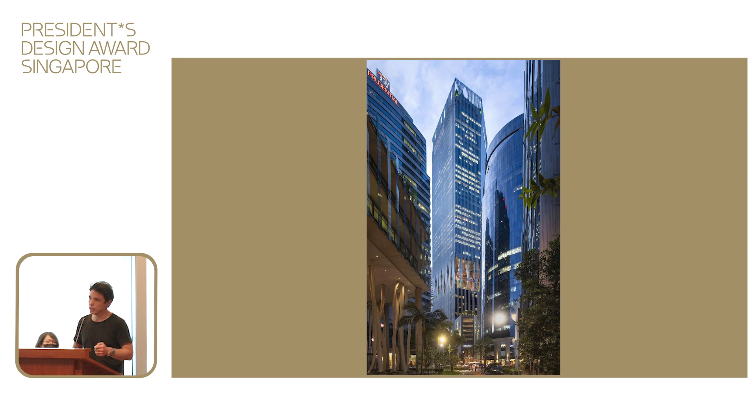I think one thing you definitely realize on a project like this, when you show up at the building site and there are 900 people daily working on it, is how it really puts you in your place. You understand it's not just your project, but everyone else putting time, effort and energy into it who has a piece of it too. This idea of architecture and its potential to connect people to something larger than themselves, to communities around themselves, has been at the heart of this project.

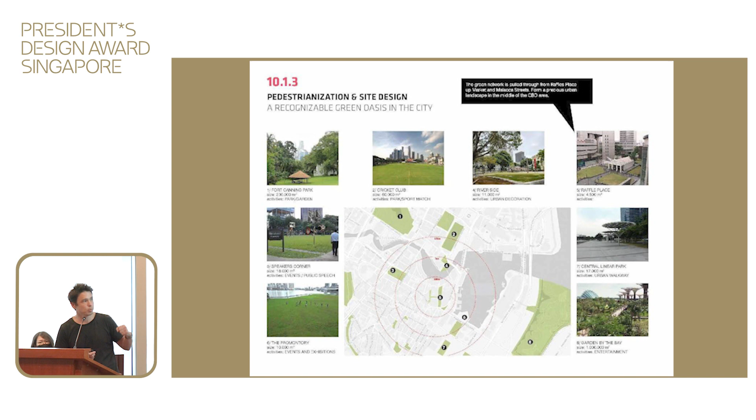From the outset, we were really trying to understand both the role it could play as a piece of tropical urbanism, a piece of the kind of infrastructure in Singapore, but also given its importance as a site in the historic center of the central business district, how it could really contribute to the different communities around. It's part of a network of different green parks and areas.

We were trying to imagine how it could be something that could begin to connect these green areas together, that could become a kind of true extension of the public realm, not only in the CBD, but again to start connecting to some of the areas further afield.

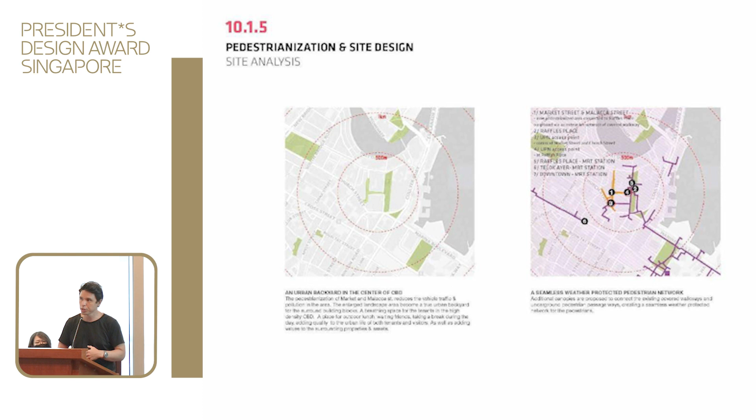So there was a starting point. There was a really rigorous analysis of its situation in plan, how it could be connected seamlessly to sheltered and shaded walkways. Weather protection in Singapore, of course, very important. How it could extend porosity in the city center, be connected to future initiatives such as the larger cycling network.

And really what we realized in the beginning, because it occupies the site of the former Golden Shoe - not Golden Mile, Golden Mile is a very important building, one of my favorite buildings in Singapore - but Golden Shoe,

it's a huge faux pas. Golden Shoe Car Park, which was built in '84, and at the time was really meant to provide parking capacity for the city center, but had also become a bit of a wall, you could say, in the city, in the CBD.

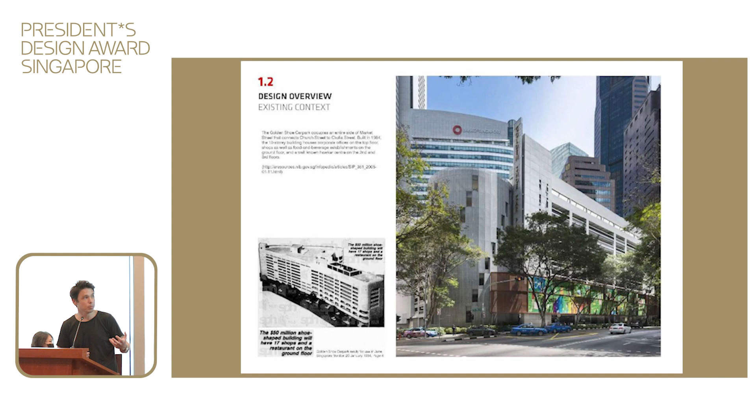Over time, as we understood, it had also become a place that was really occupied more from the hours of 9 to 5. So there was really a lot of thought about how the project could be something that increases porosity on the site, and begins to rejuvenate the site and the surrounding area.

One of the first things we realized is that the site itself, because it is amalgamated over a series of historic sites, has a bit of a strange shape in plan and required a substantial amount of cleaning up. We looked at, this is just a small subset of some of the schemes that we had looked at over time from a kind of massing perspective.

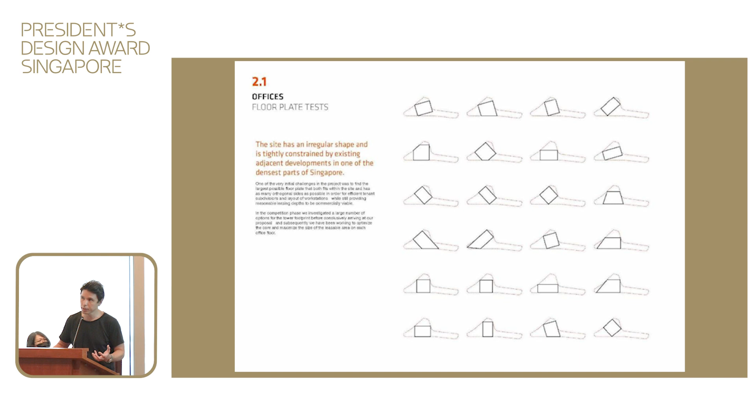But really the starting point was a kind of exercise in understanding how we could clean up the site, how we could extend porosity in the site, and what that would mean for the tower.

And it turns out that the solution for us was relatively simple, which was to imagine a tower core, to offset a floor plate to a kind of efficient and optimum depth, and then to simply rotate it to maximize how it fits in the site with a relatively simple geometry.

So it takes a kind of diamond shape, which also happens to mean that because it's rotated off axis, it provides generous views for everybody who would occupy the offices in the upper portion of the tower.

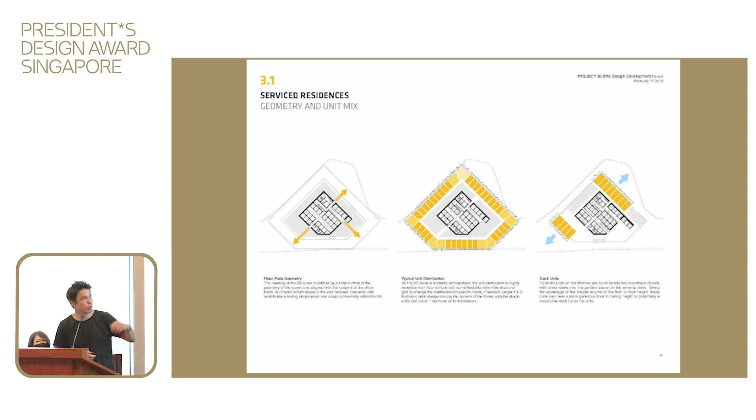So the upper portion of the tower is offices, the lower portion is occupied by serviced residences. And what this meant also is that it would allow us to then occupy the perimeter with rooms to create a kind of internal atrium space around the core, but basically also to give everybody very generous views outwards from the site.

So we had a sense of what this would mean in terms of the planning for the tower. And then we began to imagine what this could mean in section.

And we thought, what if we imagined the offices as, in a way, a kind of generic block that is elevated as high as possible to maximize the commercial value of the offices?

What if the serviced residences are also imagined as a kind of generic block that sit connected on top of the podium, so they could have access to recreational and other amenities?

And that would give us some room to begin to play with the tower in terms of the specificity of how it touches the ground, of how the service residences touch the offices, and how it touches the sky.

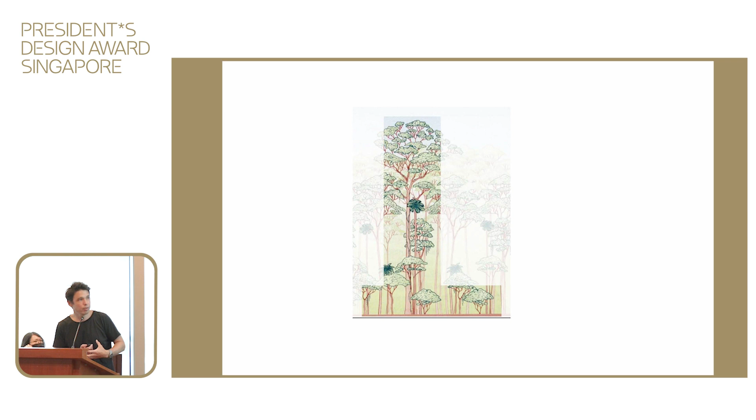What if, in a way, because it had this diamond shape in plan, we began to play with the geometric versus the organic? And then we began to fantasize and to dream a little bit about what it could mean as a kind of example of tropical urbanism, to bring the kind of lush greenery into the tower at various levels.

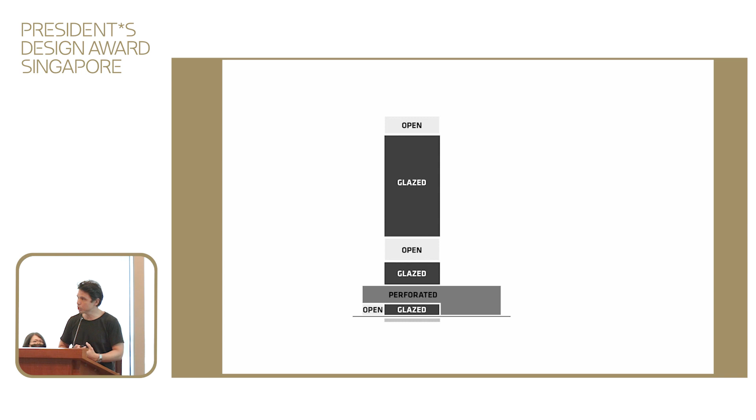Of course, this would also have to work with the facades, which would be glazed at some points, maybe much more open in other points.

And then we thought, since it sits in the historic central business district, with some great examples of modernist architecture, what if we simply took a classic modernist pinstripe facade, brought it from top to bottom to unify the tower in a very simple gesture, and then began to pull it open to reveal the green and social spaces.

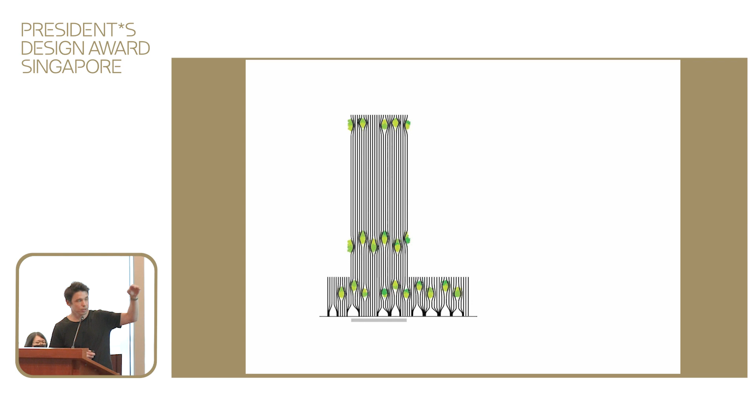That sit within the tower itself as a kind of invitation to the surrounding community to look inside the tower and to be invited up to enjoy the different experiences, the different kind of public realm and parklands that exist in a three-dimensional way.

I'm sure you've seen this project, but I thought it could be interesting to also share a little bit more about the kind of internal green spaces.

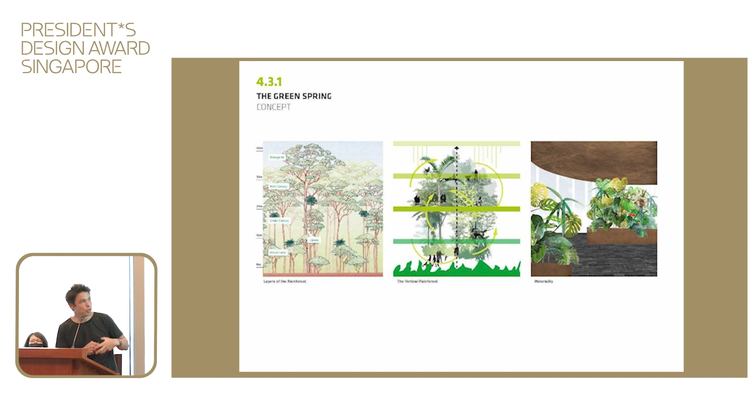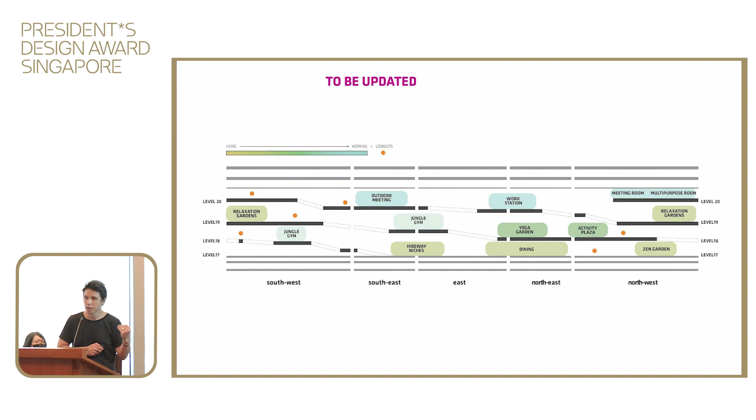We really had this idea of a kind of 30-meter high tropical jungle or garden space within this midsection, which was also an exploration of the different layers of the rainforest. In a way, it could be programmed in a continuous loop of circulation, from service residences on top with amenities such as cafes and hangout spaces, to more formal workspaces connected to the bottom of the office towers, all of this interspersed with the tropical exuberance of the greenery.

Now, what happened was we brought this idea to the URA. This project went through a DAP process, and the first thing they said was that they were deeply concerned about the survivability of the green in the heart of this tower, because at some places it sits underneath a 17-meter overhang in a deeply shaded area.

Singapore certainly has a reputation for greenery growing relatively easily in the urban context. There was a lot of discussion about the fact that we didn't just want greenery to survive, but to actually thrive. So it actually meant that we developed an entirely new process based around understanding the access of light to the spectrum of light plants use for photosynthesis, called photosynthetically active radiation.

It's offset a little bit from the visible light spectrum that we're all familiar with. So there was a kind of very iterative design process we had to come up with to understand the meaning of the planting plan, the plant selection, and how it would develop over time.

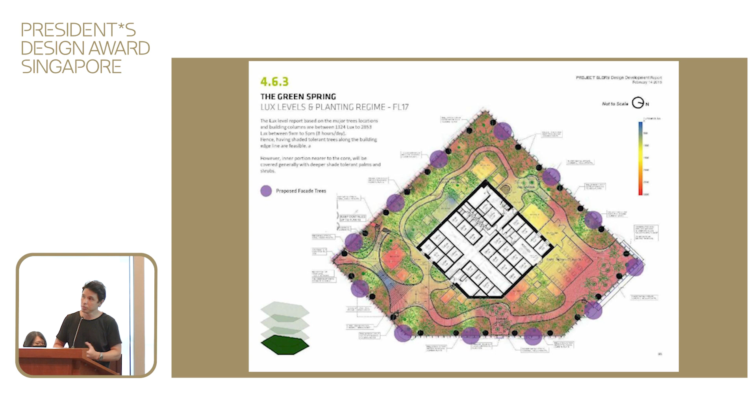So this is a kind of analysis overlaid on top of the bottom level of the midsection of the tower, called the Green Spring, where this analysis allowed us to identify different planting types that could be placed in different areas, from trees to shrubs and different types of creepers.

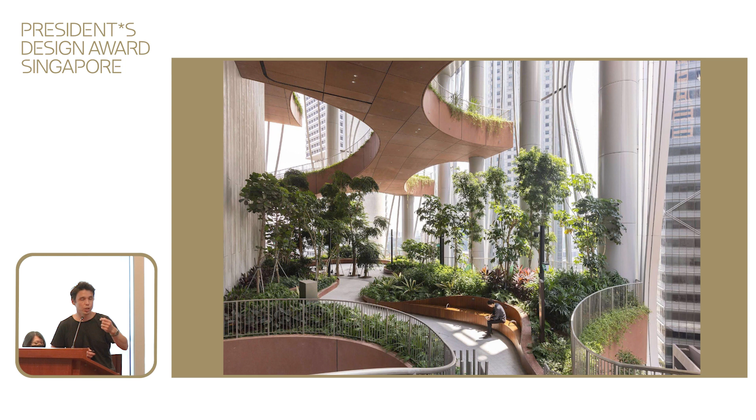If you look at some of these images, we started with a continuous spiral of circulation, but the final form is arrived at because they are almost carved out by access to daylight.

So when you're there, you can almost see and understand how the voids are created, not as a kind of aesthetic response to creating an interesting parkscape, but actually as a response to the need for plants to have access to daylight in order to survive.

And it creates this kind of incredible Piranesian space where you have views both looking up and looking down, as well as a very dynamic experience as you circulate around the midsection of the tower.

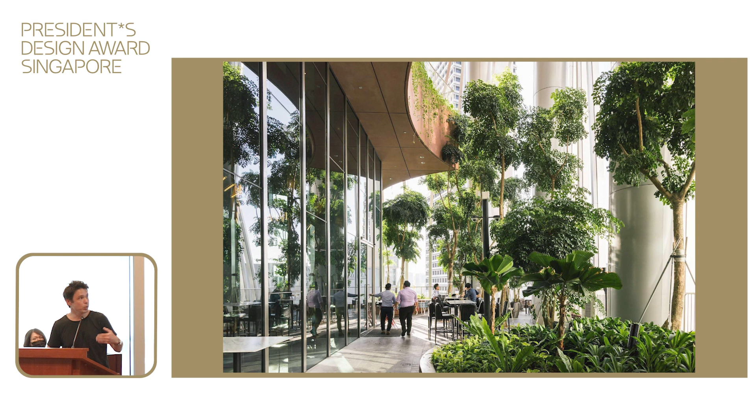I'm pretty happy to report that, at least the times I've been there, it just gets more and more green, even in the deeper spaces at the bottom. So it certainly feels like it was a productive process for us.

To go back to what I was saying in the beginning, the way we've seen this project and the role it should play in the city is really as a kind of extension of the public realm, as a series of three-dimensional parkscapes that extend from the ground floor all the way into the sky.

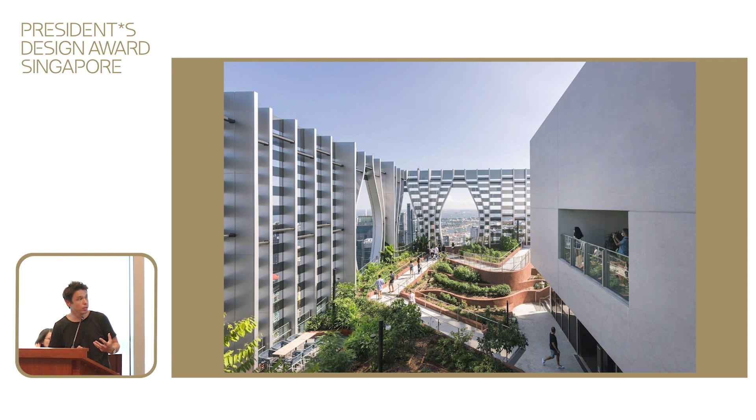I thought we could just end by going through a few images so you could see how that is deployed in the project, from the 51st floor, where there's again a continuous spiral of gardens that circulate all the way around the top, which also integrates F&B establishments.

An urban farm is integrated into part of the rooftop that generates about 80 kilograms of produce a month, which is then used in the 3 F&B establishments in the tower. For us, this has been a pretty incredible metric to understand the potential of what you can do with relatively scarce resources, in terms of how it can be part of a productive life of the tower, the ecology of the tower, and the economics of the tower.

It's been so successful that, as I understand, the restaurants have now asked to take over the entirety of the rooftop to turn it into an urban farm that creates produce for the various restaurants. There's an incredible 360-degree view at the top that is completely free for access. One thing that was very important for us was to also return the original Market Street Hawker Center back into this development.

It really has a strong history in this location as really the only kind of cheap and accessible food that had been around for a long time.

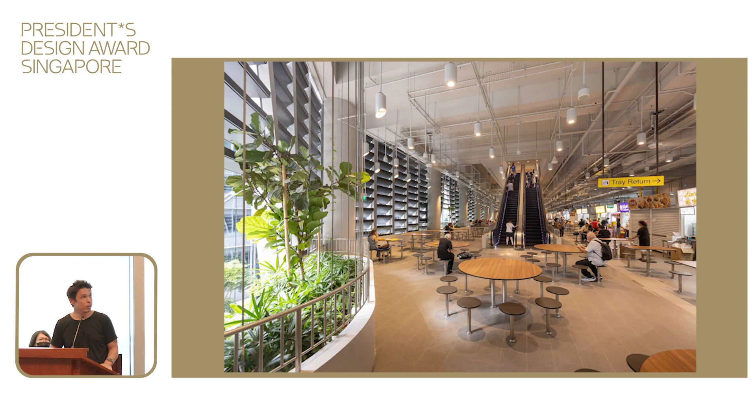So it was very important for us that this was returned and connected directly to the ground plane when the project opened again. And you can see how the facade begins to open up at the various levels and integrates access for different types of amenities and uses.

Very importantly for us also at the ground plane, we have pedestrianized a portion of the neighboring Market Street as part of the redevelopment of the area, so that it becomes something porous, open, and contributes to an active city and streetscape. Thank you.

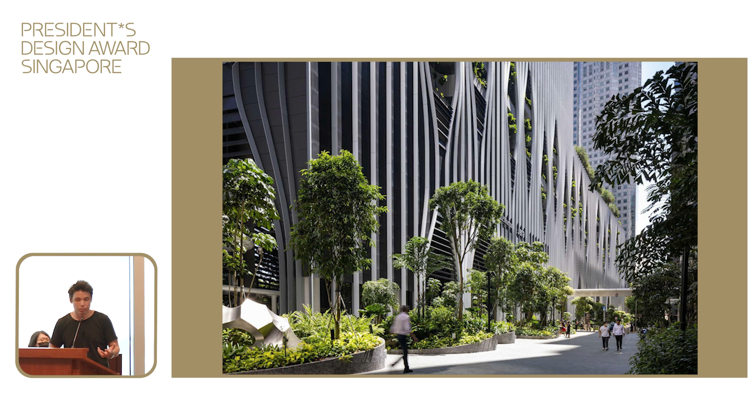Next, we have Design of the Year, Hack Care, tips and tricks for a dementia-friendly home. Representing Hack Care are architect Ong Ker-Shing, director of Lekker Architects, and Mr. Hunn Wai, co-founder and creative director from Lanzavecchia + Wai.

Lekker Architects is a multidisciplinary practice that explores the social-emotional potentials of design. The studio searches for designs that help people learn and grow and form more inclusive collective relationships. Alongside her role as director of Lekker Architects, Ker-Shing is an associate professor and Bachelor of Architecture program director at the National University of Singapore's Department of Architecture.

Lanzavecchia + Wai, established in 2010, is an internationally renowned award-winning design studio based in Italy and Singapore. The studio's work includes research projects for Herman Miller, limited edition objects, mass products for brands such as Living Divani and Cappellini, as well as special commissions for major brands and museums. Representing Lanzavecchia + Wai is the director and co-founder, Hunn Wai. Ker-Shing, please.

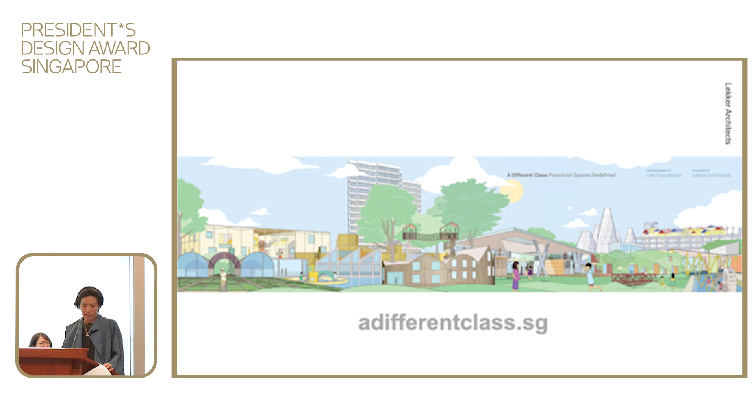Easy. After all, we delivered A Different Class in less than 6 months. It ended up taking us until the end of 2020. So Hack Care was born out of a frustration that we had as designers with the state of current dementia design guidelines. Now, design for dementia guidelines all tended to be very high level.

Perhaps the most famous of these is the evidence-based Dementia Enabling Environment Principles by Professor Richard Fleming and Kirsty Bennett. They're all really important guides, but a bit hard to know how to apply. We wanted ours to really be within reach.

So it's a 240-page book in the guise of an IKEA manual to help people adapt their homes for their loved ones with dementia. With dementia affecting so many people, most will at least spend the initial stages of the disease at home. Besides, sudden and abrupt changes in routine and environment can really speed up decline, so it's really best to age in place, so to speak.

Why IKEA? Well, from our own experience at home, we were already using a lot of IKEA products because they're so accessible. With my father's type of dementia, you start to lose the meaning of signs. So there was a while that my father only recognized water, meaning water that he could drink, by the type of glass it was served in.

Luckily, the type of glass that he attached the idea of water to was this kind of Duralex tumbler that IKEA has very similar glasses to. You can see the Pokal on the right. So we got a dozen of these and put them everywhere he would go, in our homes, at my aunt's home, because otherwise he would refuse to drink. And dehydration is a very common and dangerous issue.

Or when we needed to use mattress protectors, we found that the shower curtains at IKEA were cheaper, more waterproof, and more durable than commercially available mattress protectors. So turning to IKEA made sense.

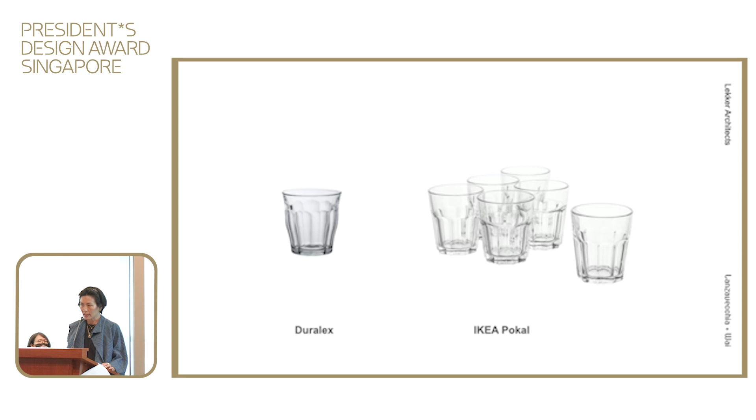All of this is downloadable for free at hackcare.org, and close to 3,000 hard copies have been given out to healthcare providers, caregivers, and people with early diagnoses. There's also a mobile version where all of the content is conveniently accessible.

Now, the book contains hack ideas and essays and provocations that give people insight into dementia and how the environment can play an enormous role in caregiving. The tips and tricks are also contextualized within some understanding of cognitive decline and how one's relationship to the environment changes along with the progression of the disease, demonstrating through practice the principle of person-centric care.

Now, the goal was to help people to think creatively and flexibly, to make tweaks to improve the way they care. At home, we had observed how my father, in his decline into dementia, was incredibly responsive to changes in his environment. And more importantly, that the manipulation of the environment was really in the hands of us, his family, and not in the hands of architects and designers.

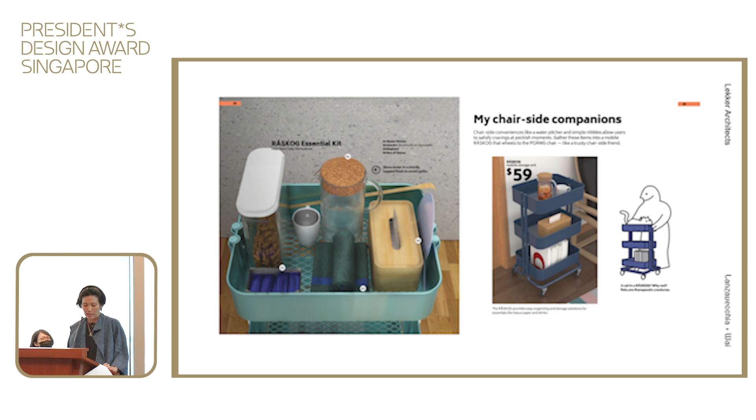We realized that many caregivers were constantly hacking, sometimes using their own ideas, and sometimes through the sharings in WhatsApp groups. And the adjustment is constant. What helps is to develop a mentality of constant tweaking to routines and the environment as needed, adapting to the progression of the disease. We sought collective wisdom.

We spoke with professional caregivers, psychologists, geriatricians, and community dementia care experts. We listened to a lot of personal stories, visited homes, looked at the kinds of challenges dementia poses, then came up with tips and suggestions that covered daily activities.

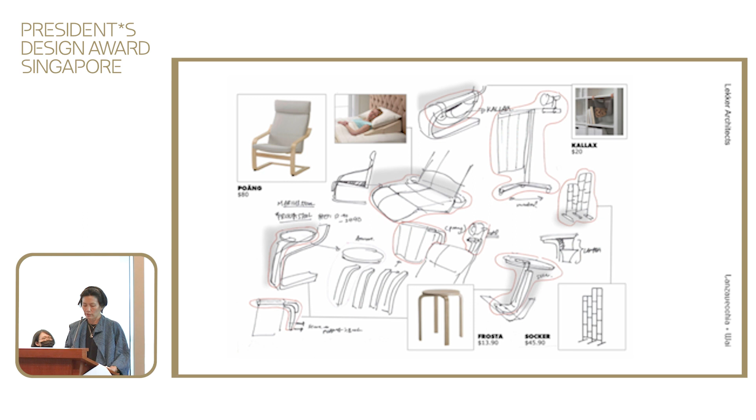Now, the work really started by thinking about furniture hacks, and Hunn will talk later about the process of creating these prototypes, but I want to give a little bit of background to this.

It also made sense to us as a first hack, as many people suffering with dementia spend an increasing amount of time sitting, so the chair became a significant focus in the home. The chair had to become the center of life, such as drinking water, napping, being cared for, spending the day. So we looked at how to adjust the chair to enable all those things.

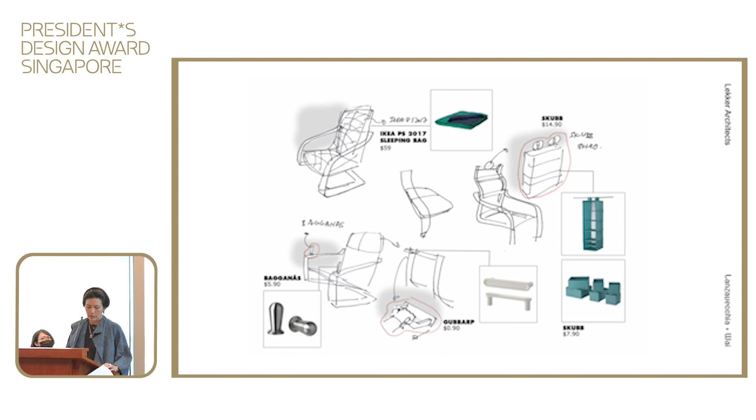How can someone nap here without their head bobbing around? Can higher handrests help them stand up? So our hacks gave us this prototype, and we have a shopping list and an instruction manual for it.

But as you can see, perusing all the other hacks, what we're trying to do is not create one definitive solution. Hacking as a method isn't about a final design product, so much as an ongoing process of optimizing and adjusting. We feel that this is much more appropriate to a disease and a condition of care in which the challenges are constantly shifting. And each person's dementia journey is unique.

You may have heard the saying, you meet one person with dementia and you've met one person with dementia. The progression and presentation of dementias, all varied, are linked to the patient's pre-morbid personalities. Now, I won't talk about the other hacks as Han will. We then moved to the scale of the room, embedding micro worlds into the rest of the home.

We experimented with furniture setups to see how they could be accommodated into some typical living room sizes, and how the arrangements of furniture within rooms can evolve and adapt to the needs of the person with dementia, always keeping them embedded in family life.

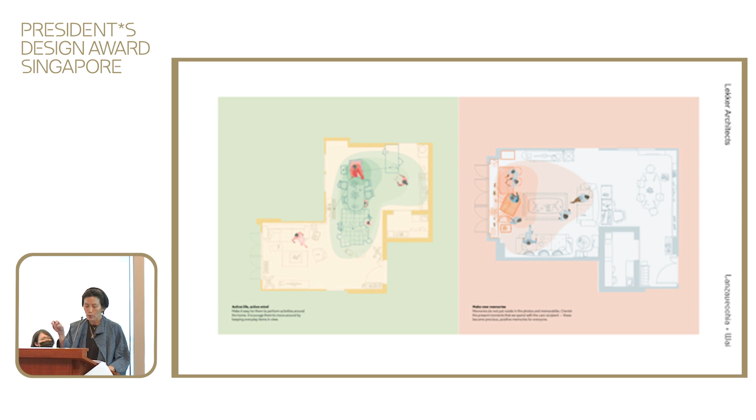We tried to address other more intangible concerns, like time. How do we cue our loved one that it is dinner time? We looked at the role of smells, lighting, and sound. And then coming back to the shower curtain as a mattress protector starting point, we looked at products that might be used in different ways.

So from a previous design research project on aging-friendly neighborhoods, we learned that many Singaporean elders are uncomfortable using mobility aids, even if they need them. They don't like how it calls attention, they find it embarrassing, so they prefer to struggle unaided, lean on umbrellas, or push shopping carts instead.

So in Hack, we looked at ways in which IKEA products might be misused, like in this elevation where handlebars are disguised as a series of everyday decorative objects. You see the line in red there, yet it provides guidance from A to B.

Or the fidget board, for example, made from an IKEA chopping board fitted with simple hardware fixtures, or our tote bag, or even a pillowcase fitted with zippers or eyelets and laces.

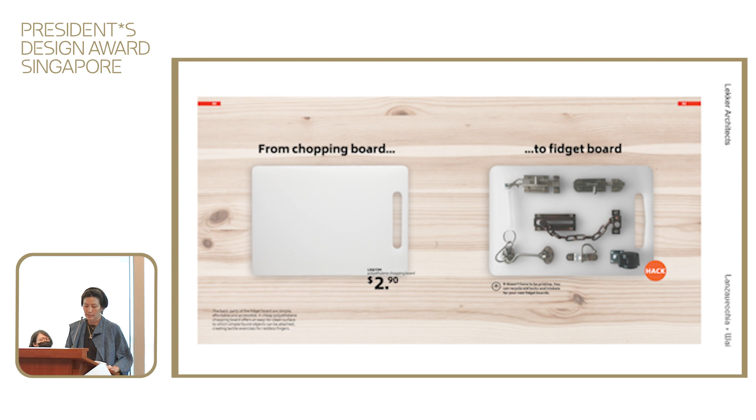Now, the book is deliberately an optimistic approach to a very serious and depressing reality. Having a loved one suffer with dementia is an immensely difficult experience to go through. Caring for them yourself makes it even harder. Getting the tone right was really important.

We wanted this book to spread a manifesto, to empower persons with dementia and their caregivers. It's a reminder that we're not alone and that there are some simple things that can help alleviate some of the everyday difficulties. And these ideas should be free, shared, they should be empowering, and they should expand the discourse.

And now I'll pass the mic to Han.

So, my name's Han Wai, and the great thing about this is that how I got to know them as friends was because I was a moderator of a PDA session in 2016. I wanted to say, hey, you guys are doing cool stuff. Oh, you're doing cool stuff too. Let's talk about a project, right?

And then the project came into existence the next year, in '17. So how we got into this project was because we did this collection of rethought elderly furniture called No Country for Old Men, which is quite a violent movie if you know it, but quite a nice title used this way. It came from a provocation: when we grow old, we don't have choice over the things that we own, which is strange, because now I can choose from so many jeans, but when I grow old, there's only 5 wheelchairs, 7 walking sticks. And those define our relationship with the environment, with how we interact with the new reality. So we decided to delve into that.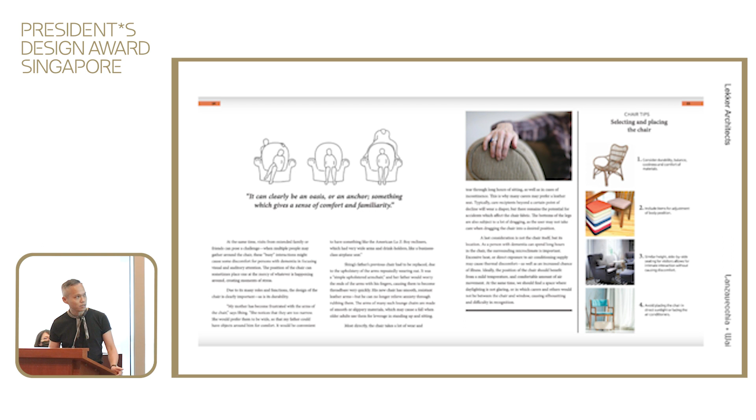And you can see the headrest, 02 up there - it's actually the bamboo chopping board that you can buy from the kitchen section. So it was kind of like jazz, a punk approach to how we were designing things, and I think that's how we saw design: it's not defined by domain, but more of concept. Concept decides what comes in.

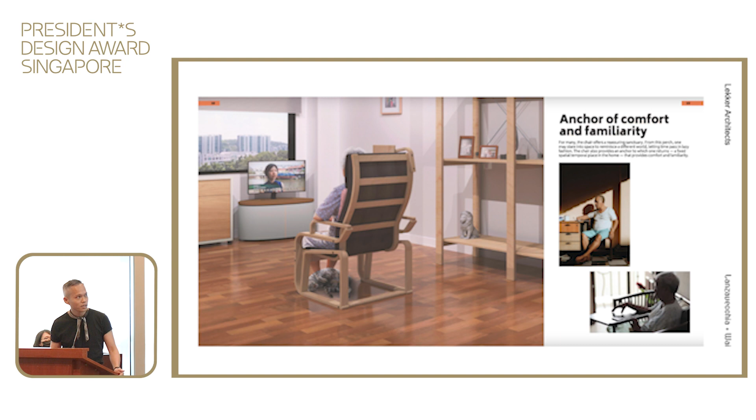Yeah, so we had this term called 'living chair.' The life is all around - it's satellites around the chair, and that's something that you would have to reprogram your domestic spaces for.

So it's kind of in plain sight, you know. It's using the vernacular of IKEA, which everybody knows and loves. It doesn't ostracize you, doesn't say you're weak. It's not aluminum, it's not plastic. It doesn't treat you like a piece of meat. You're still human, right? At the end of the day, you're dealing with a loved one.

So as you can see, the armrests are actually from a famous stool, right? You kind of hack together.

But I think just to echo what Xing was saying is that it's not prescriptive, right? It's more about adopting a mindset that you can do it too, which is not prevalent in the top line, high principle dementia advice of today. So it's more about redefining what design is used for, or rather using the design method to change mindsets and therefore empower, because that's the thing you don't really have when you're faced in this situation.

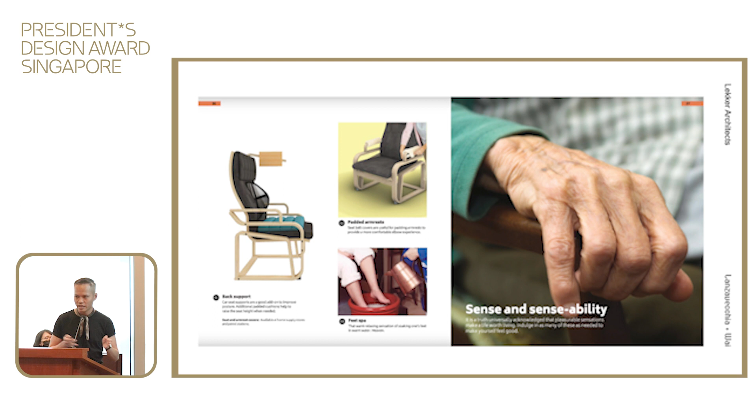Right, so you can see the back support, padded armrest, things that you could sew by yourself. So it doesn't have to be exclusively IKEA. It's just the system. It could be a good morning towel. It could be anything that has emotional value to the user, as what Xing said about the Duralex and the IKEA equivalent. Yeah, there you go.

$9.90. If you can do it now as well. If you have a Poäng and you find yourself falling asleep.

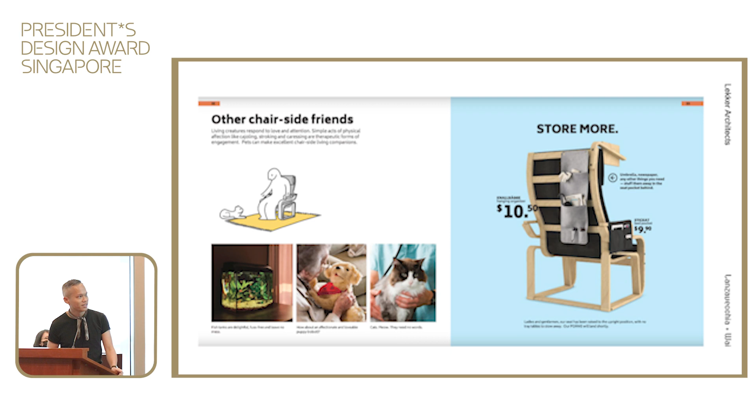Next we talk about the Algot. So this is a shelving system, right? You can create a little micro-architecture around it. There's the blinds attached to it, there's a pegboard, right? So there's a certain facing to it, and depending on your floor plan, you can face it in the way that you want. And that's a beautiful thing.

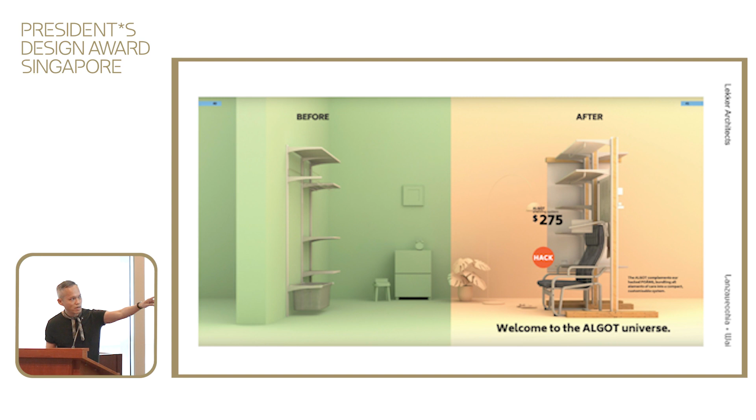So please go and have a look at the publication. And you can see the memories close at hand. Before, after, and we also take care of the carer's corner, because carer fatigue is a real thing. If you care for an elderly, that's a real thing.

So at the back, you can still do your emails, you can still do your Zoom, while still be in sight of your dad, your mom, right? And this is all SKÅDIS, right? Everybody knows SKÅDIS, right? And one of the great things about IKEA is that it's worldwide.

So it's not just Singapore. And that was something that we thought of since the beginning, right? How do we take up what is global, what is familiar, where is a place that I would go to even if I don't like it, who flips through a furniture catalog other than IKEA's? Who goes to IKEA not for furniture? It's mind-boggling. So as a concept, as an ecosystem, IKEA has all of these things, and it's global.

Like when I was studying in Eindhoven, I went to IKEA to eat breakfast because it reminded me of Singapore. Yeah, for real. Like, I want the meatballs and the lingonberry sauce. So IKEA is something that has all that cultural memory that all of us love.

So we have been approached by British institutions, dementia institutions in the UK and also in America, and this is going to a nice museum in '25, which we'll share more next time.

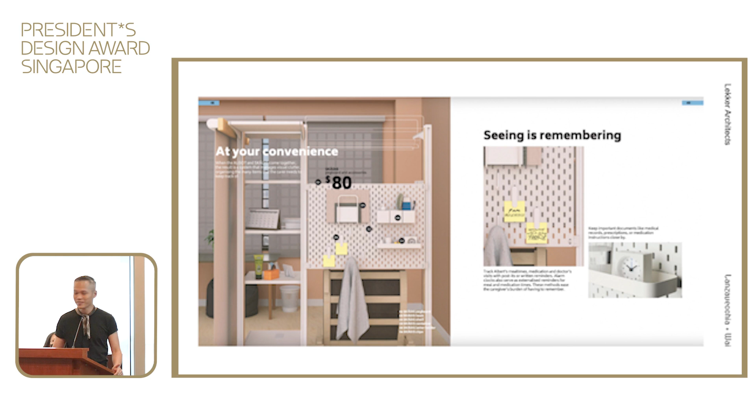The blinds, so your blinds are attached to it as well, so you can control light, because that's when dementia sufferers have a real panic, is when the light changes, whether it's dawn or dusk. So you can have this little thing attached to it, and it's all super affordable.

I'll just leave with this quote. I always believe a rich man is someone who can see beauty in everything, it doesn't matter the price. A powerful designer is someone who can see possibilities in everything. Thank you.

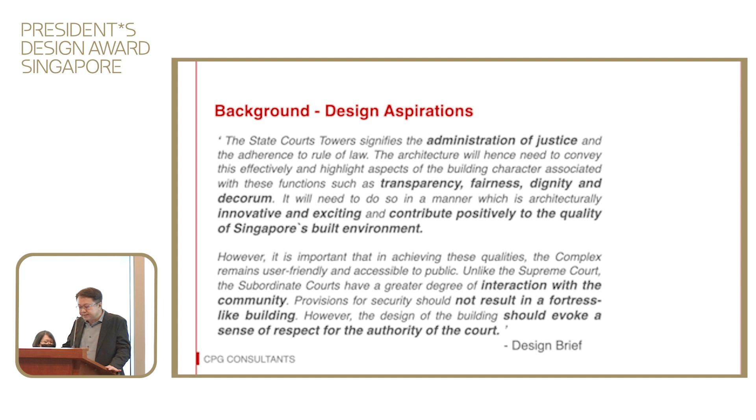Also, unlike the Supreme Court, the State Courts is a building that has a higher degree of interaction with the community. So it's a building that should not result in a fortress-like building, but rather one that should be open. But it should also at the same time evoke a sense of respect for the authority of the court.

We have actually been searching for a good site for the building since the late 90s. But eventually, the most important aspect that determined the final location was the vision of a judiciary hub here at Havelock Square, where the State Courts would eventually be integrated together with the new Family Justice Courts, which is currently undergoing a major addition and alteration, forming a one-stop integrated judiciary hub. By this, operations can be optimized, with shared amenities, infrastructure, and resources.

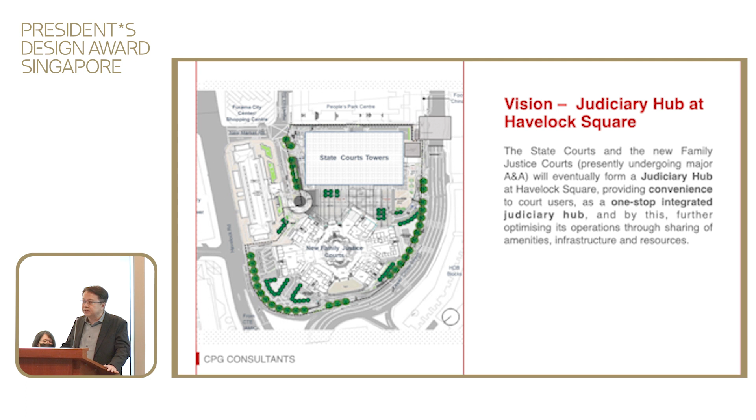So with this particular site, we have taken over what is actually an open surface car park. And we knew from the beginning that it was going to be a very, very tight site. This, with the brief, eventually led to a massing that would be the first high-rise courthouse in Singapore.

Not only is it the first, it is also, in fact today, the tallest government building in Singapore. But not only that, it has achieved being one of the 3 tallest courthouses in the world at 178 meters tall. It also accommodates about 53 courtrooms and 54 hearing chambers.

So a bit about the design approach. 3 very important aspects that we wanted to maintain: 1, organizational clarity. 2, transparency. 3, the making of collective spaces.

So for the first, what we have done in the design, as opposed to a singular building form, is create 2 separate towers, distinctively clear in terms of organization, with the front tower occupying the courts, while the back occupies mainly the support offices. So we have the front, called the court tower, and the back, the office tower. These 2 towers are linked together via sky bridges.

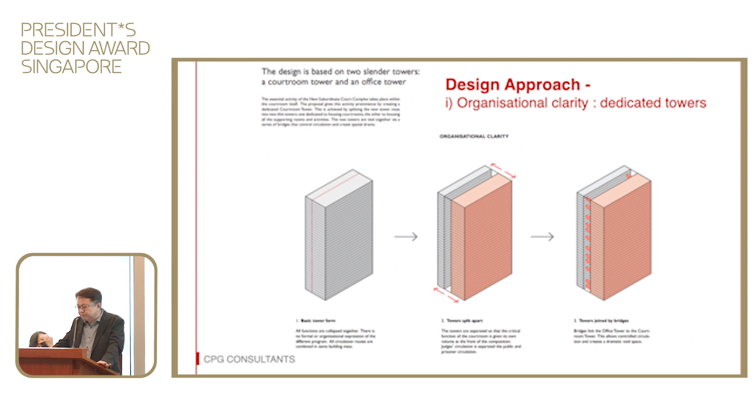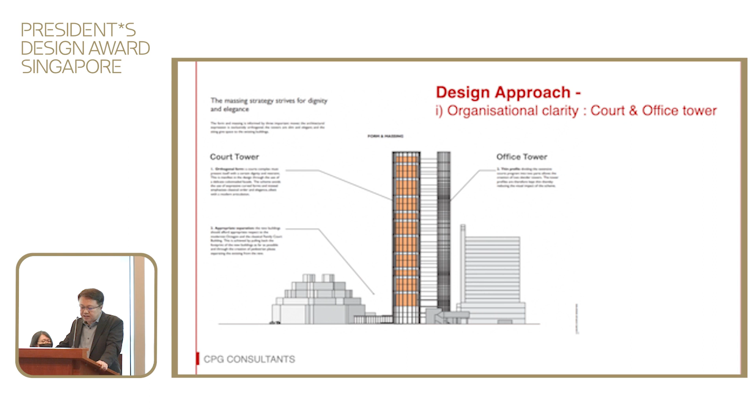As you can see from our studies, the rear tower, which is rather slender, is the office tower, and we have the slightly larger court tower in the front, facing the current, former State Courts building, which we call the Octagon. Here we studied the scale and the difference in height compared to the former State Courts and the new tower. Again, a study model, as you can see from the photo, shows the rather slender tower at the back.

The second design approach is one of transparency. Here we see the open facade as a metaphor for the judicial system - one that is fair, one that is transparent. The design has taken away the facade typical of a high-rise tower and removed it, revealing the contents within. By peeling away the facade, what is unveiled is the clarity of the floor plates, which we now call the terraces. On these terraces are where the courtrooms, seen as square cubes or boxes, are placed.

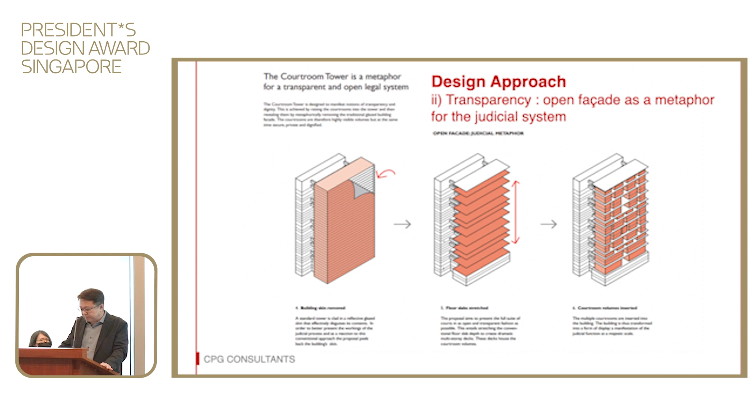Again, this is a study model that we have done. As you can see, behind the open frame structure are actually the courtrooms, which is the core function of the court tower.

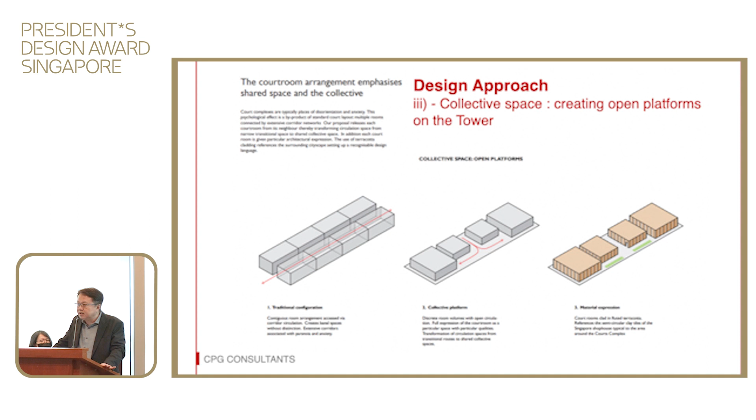The third approach that we wanted to do was to create a collective space, an open space that created a place, a gathering space for court users. This is as opposed to what's more conventional, where we see the long corridor feeding off to different courtrooms. This only creates further anxiety and disorientation to court users when they come for a court hearing. So instead, we wanted to create an open platform, an open space that people could gather and move around freely without that anxious feeling of walking through a long corridor to the courtroom.

So in terms of form and massing, as we mentioned earlier, 2 versus 1, the 2 towers enable it to not only have independent function in terms of its organization, but also the towers were read separately instead of a singular large tower. This helped reduce the visual impact of the design. Also, the 2 towers were designed to appear as if they are slightly, gently moving past one the other, never fully aligned.

As we look at the tower itself, the important criteria, as we highlighted in the beginning, was that the court complex had to present itself with a certain dignity and restraint. This is carried through with the open frame structure through the colonnade facade, as you can see here. The building also took a very important orthogonal form as compared to curved forms, and this emphasized a classical order and elegance, albeit a modern articulation. So by this, you can see a sense of formality, a sense of order that befits a court building.

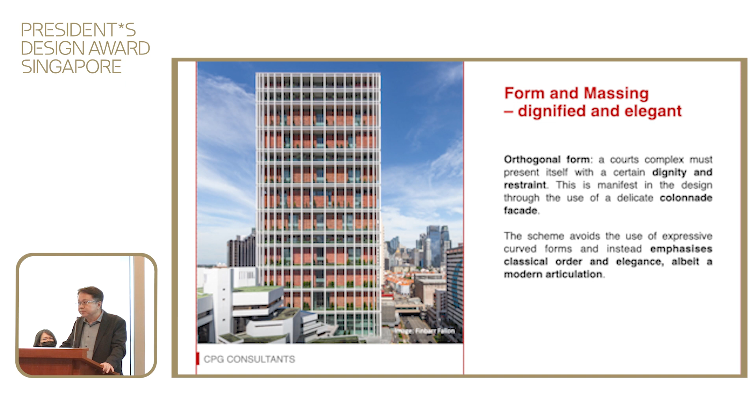Behind is also important, the office tower at the rear. Here, the office tower faces Singapore's CBD, but it's expressed as a very thin and elegant slab tower. Furthermore, we have brought the grid, the open frame structure, also to the rear of the building. But here it features an expanding and contracting grid. Vertically, the grid contracts where the service cores are located at both ends, and it expands where light and views are required in the middle, which are the offices themselves. The modulation of the horizontal grids also brings the eye across the facade and towards the sky, providing a clean and absolute form with a sense of a playful rhythm.

More importantly, the tower itself had to respect its 2 neighbors. One is a national monument, the current Family Justice Courts. The second is the former State Courts building, which we call the Octagon. It's a conserved building. So these 2 buildings stood very near, in proximity to the new tower. At the end of the day, the tower had to respect both of these buildings, especially the Octagon, which has a very, very strong geometric form.

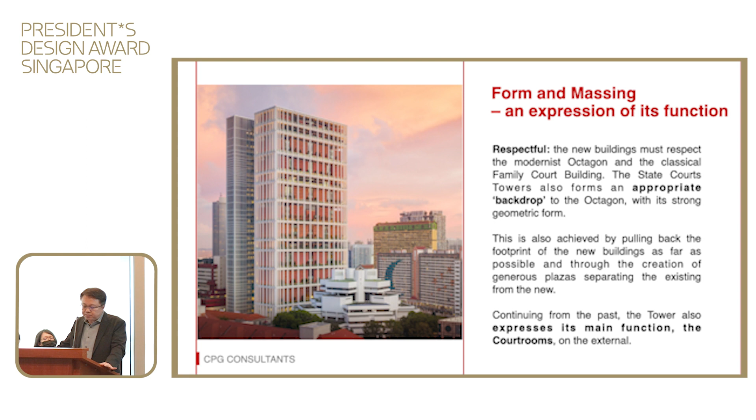Furthermore, if you can see the Octagon building at the side, with its strong geometric forms, those forms are actually the courtrooms themselves. So in a sense, the old Octagon expressed the courtrooms, its core function, externally. And the new tower had also incorporated the same approach, where now one can see, with the unveiling of the facade, the actual core function of the tower, which are the courtrooms themselves. So this is a very sensitive approach that carried forth the same approach from the Octagon to the new tower.

Also, designing a court building requires a very thorough, deep understanding of the complexities of programming and circulation, primarily three major groups: the judges, the persons in custody, and the public. So the two slender towers, while linked by the bridges, created this very dramatic void space that brought in natural light in the middle. But more importantly, it also helped in creating a controlled circulation. But more than just the floor plate, the planning of the court spaces is not just horizontal but vertical in nature, so a thorough understanding is needed in its planning. Most importantly, the criteria to separate these three groups are very critical in the planning of the whole tower.

So again, the two towers are linked by 39 bridges. While they function as bridges and circulation, they also form a structural element that allows both towers to function singularly as one. We even had to carry out a wind tunnel test to validate that the deflections of the tower, particularly the office tower, are within human comfort.

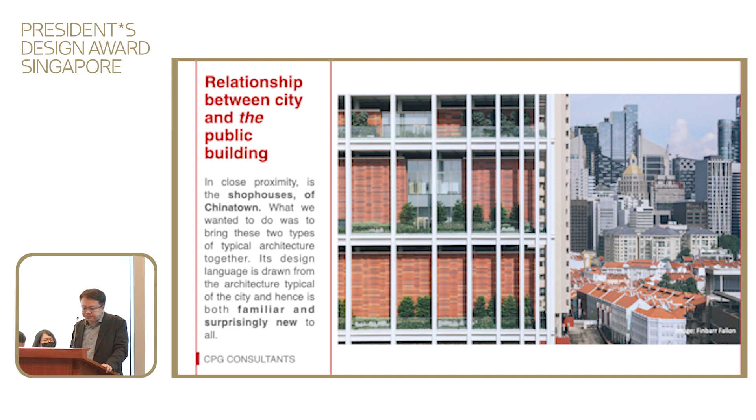Most importantly, the relationship with the city is something we wanted to address in this public building. We wanted to bring two architectures together, one typical and one of the new modern high-rise, to create something that is familiar and yet surprisingly new to all, creating an identity that's distinct yet familiar.

The courtroom boxes were eventually clad in pigmented precast concrete panels that took inspiration from the colors and textures of the terracotta roof tiles we see in Chinatown.

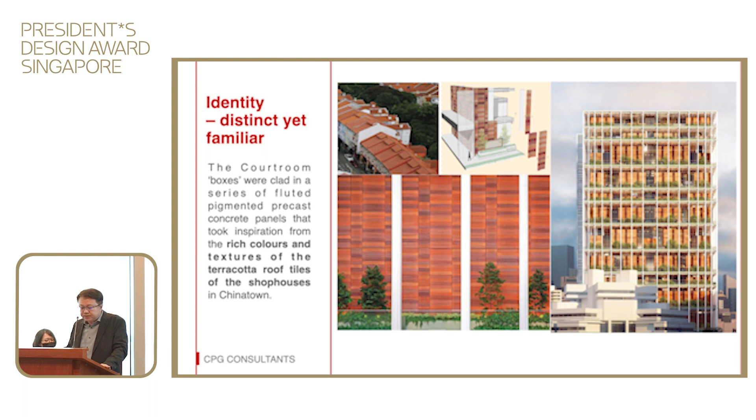These are some of the work efforts behind the scene. There's a lot of ingenuity here because it's not from the textbook, and a lot of tests and experiments we had to do to finally come out with a product we're very satisfied with.

So it's more than just mere finishes, because this material has been applied three-dimensionally across the courtrooms to create a volumetric box for the courtrooms. These panels also function as physical enclosures to the courtrooms behind, without the need of a secondary wall.

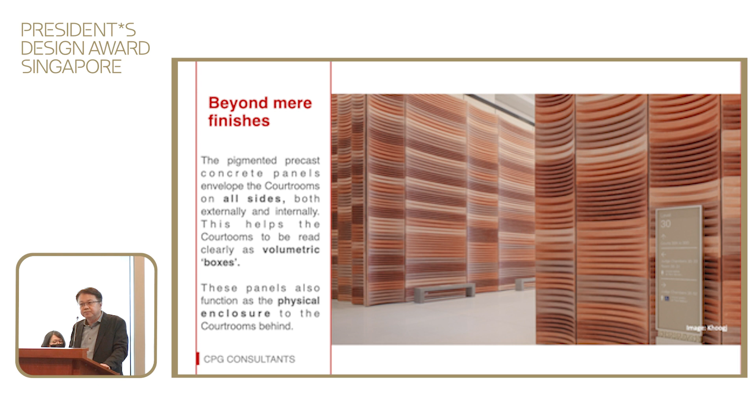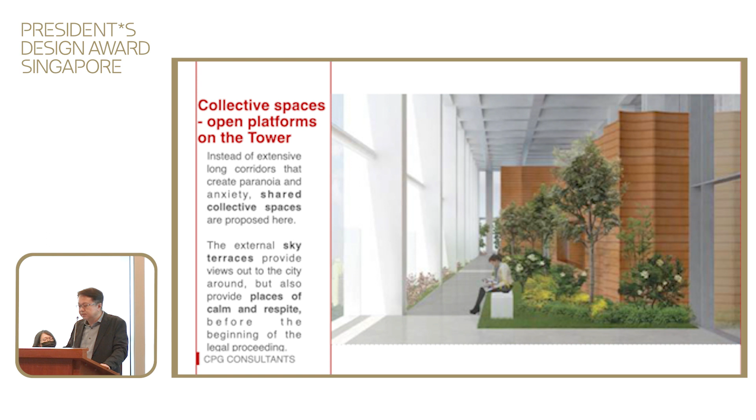We wanted to create collective spaces, as we mentioned earlier. This is one of the efforts we've made, to create places of calm and respite for court users before the beginning of their legal proceedings. The sky terraces enable people to find this precious moment before proceedings begin.

Lush greenery is something we wanted to bring even into a judiciary building, with sky gardens on 12 of its terraces fully landscaped. Even the rooftop of the podium creates an opportunity, as I call it, the great divide between the two towers.

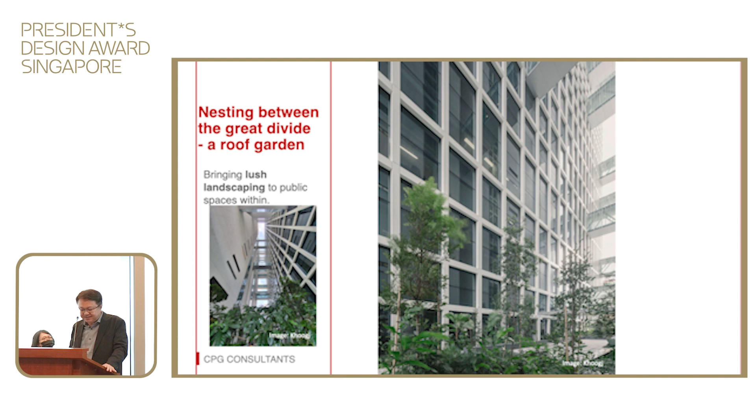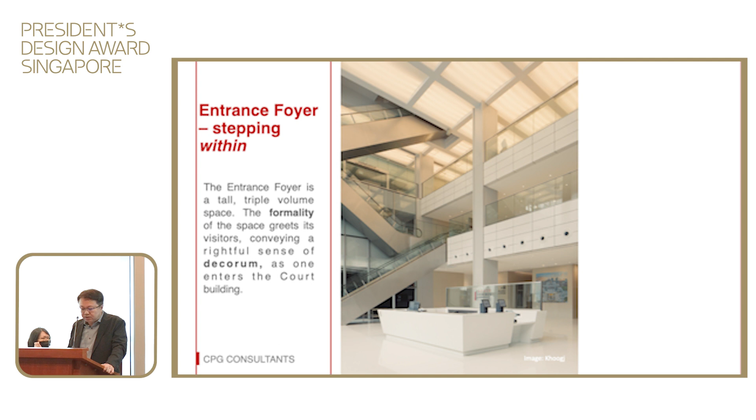Stepping into the foyer, it brings a sense of decorum for any visitor entering this court building, knowing that one has entered into a different space.

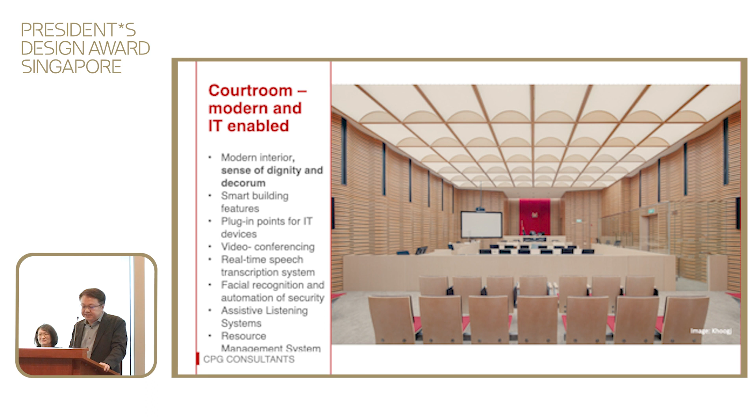I'm so happy to be back here, to know that this room is back in business after COVID, because many thoughts, many designs, many discourses have been shared here. I think this is what we as architects value, sharing our thoughts with each other.

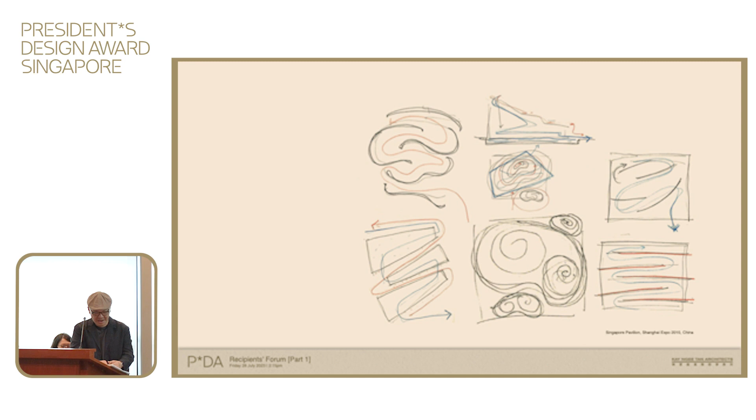This box is naturally a challenge to show you my folio over 30, 40 years, but we've selected a few. How important they are - very compacted forms of architectural discipline, if you like. They allow you to understand the local climatic condition, the needs of the client, as well as testing out architectural form, which later on you can use for other projects.

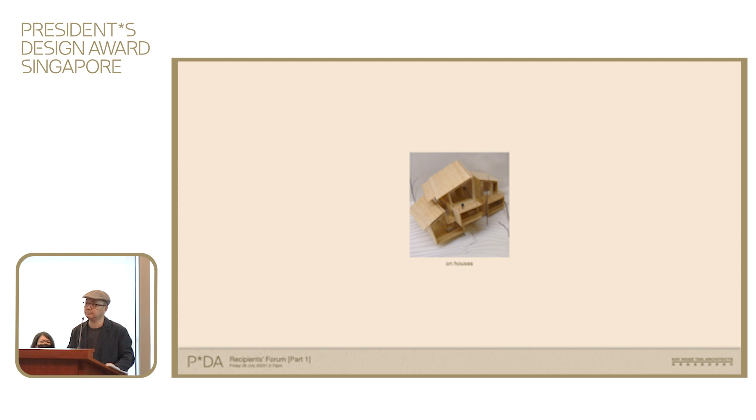Over the years, we have had the opportunity to design quite a few houses. And as you can see, because the clients and their needs are different, the characters are different, so the outcome of these houses are also different.

At this point, I must say there is one book that influenced me a lot, that is the book by Mr. Lee Kip Lin, The Singapore House. I met Kip Lin in England in the 90s, and we shared our thoughts about tropical houses. I understand what he was trying to tell us about the traditional black and white houses, how wonderful they are. But my role, I thought, is after understanding this, perhaps I will give them a new life, using modern aesthetics to continue that tropical house idea.

So you can see here, there are some double roofs. The lightweight secondary roof allows the ventilation of air, just like the big pitch roof, with the ceiling space allowing ventilation.

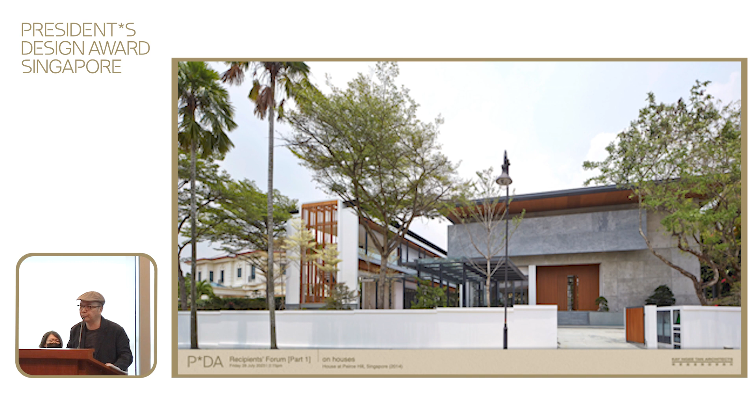But within the two houses, there is one gesture they share. The mother's house has got a horizontal L-shaped marble wall, which I explained why. And the son's has this lattice, also an L shape, but vertical, jumping over the roof and allowing natural ventilation, because he liked to invite friends over for parties.

This picture was intentional because I always remember a painting in Urbino called The Ideal City. That painting has a building with a door slightly ajar. This house, the main house, has the same quality, because you can then look into the house, the inner side of the mother's home, which has a courtyard with bonsai, with trees, and is very warm and soft inside.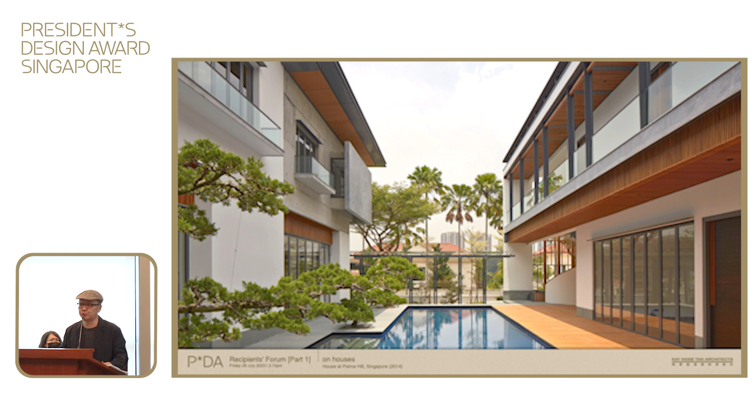At the side, the two buildings share similar aesthetics. And they both look onto the swimming pool, which the mother and son share.

Then we realized along the way, the mother is a keen collector of arts as well as wine. But there was this particular sculpture or artifact she kept away in a storeroom. We realized it was something that she and her husband, who had passed away by the time we designed the house, collected when they went around China giving lectures. They were both very successful doctors.

We decided to display them in a more intimate environment on the second floor, in the family room. I didn't want to overplay it, so we allowed natural light to gradually light up the collection. The natural light occurs because of the L-shaped wall being pulled out from the main wall of the RC structure. So this is the Palms Hill house.

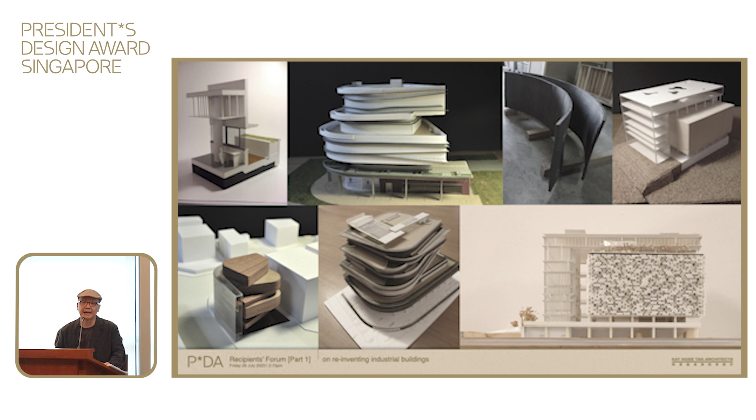On the right is Select Building, which we designed after Bread Talk, but slightly differently, because Select is famous for its food court, lunch takeaways, and Chinese dim sum. So we devised dim sum basket-like ceramic tiles to cover up the exhaust windows. That ceramic part was done in Taiwan by a ceramic artist.

Back to Bread Talk, as well as some other buildings, because of the 3-in-1, meaning the HQ, the central kitchen, and the retail part all come together, the traditional industrial area became lively. Not only does the neighbor use the building for lunch or dinner, we noticed that Singaporeans would drive all the way there with the family over the weekend.

So it actually works. Now currently we are designing a similar type of building in Shenzhen, and the one below is in Chuzhou, near Nanjing. The owner also collected sculpture, so it formed part of the HQ building and brought life to the business park there.

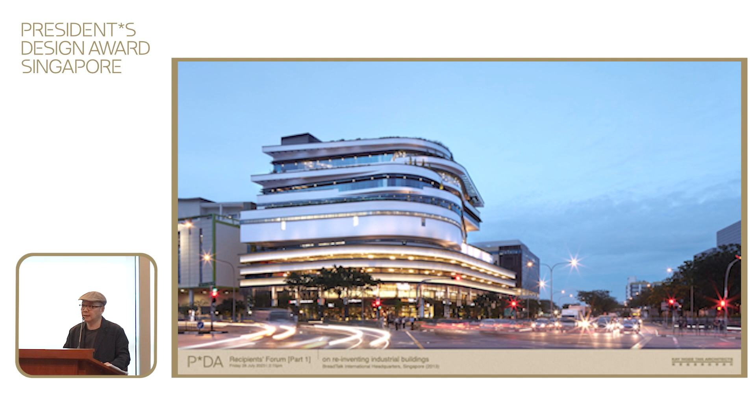Okay, the building. This building was inspired by the layers of cakes and bread that Bread Talk actually produced. But the shifting of these floors has an intentional purpose. It provides shading for the floor below, and the different volumes come from the needs within, like certain central kitchen functions needing higher volumes or storage area.

So with that, we are able to compose the form, if you like, with outside terraces to provide shading as well as some greenery. Surprisingly, it also introduced air pockets for better ventilation.

These are images of Bread Talk's lower floors. The concept is actually quite simple - not unlike when you go to a showroom of BMW or Audi to test out your cars. So you come here, you sample the Laksa that they would serve, or you look at the model of how they operate. For the foreigners, the investors, they would say, 'Oh, I like that, I will take that, and I'll bring it back to India or Dubai or England.'

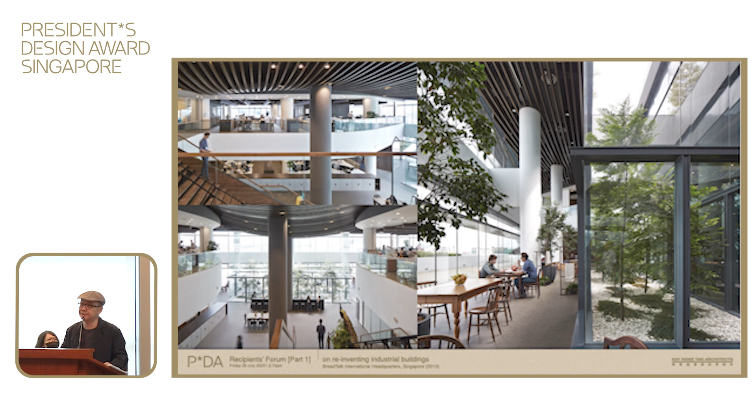The next subject I'd like to talk about is the conservation work our office has been doing. Although we've done quite a number of conservation projects, each of them is rather different due to the site condition as well as the historical background.

The first one is the Sultan Hotel. Now, Sultan Hotel is set in Kampong Glam, which is a really important cultural district of Singapore. Not only that, it's very rare that 2 rows of houses became available - there are actually about 10 of them, with one of them being a press building that was established about 100 years ago.

So we took over the task to combine them and converted them into a 64-room hotel. More importantly, there are common spaces like the back alley as well as narrow corridors that the local people are still using. We landscaped them and revitalized them, giving back to the community the spaces they wanted.

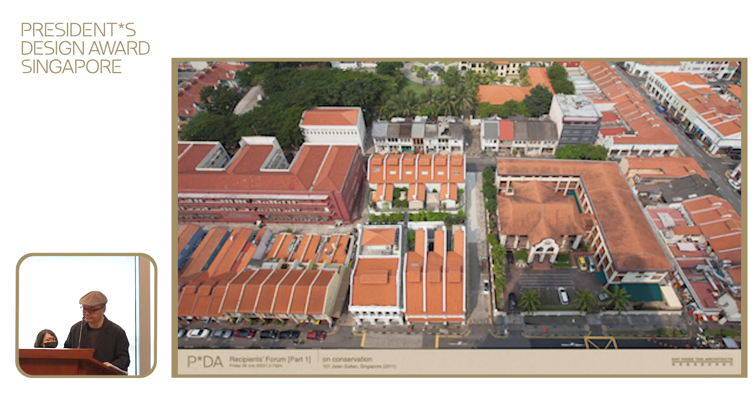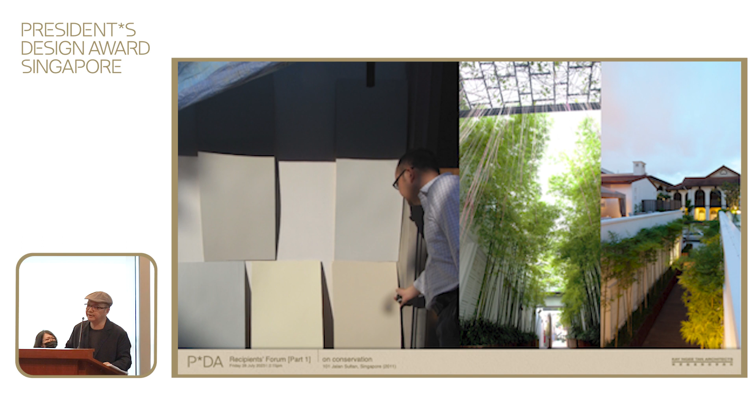You can see it was quite run down. You can also see the features of this main building have got Malay features, traditional Western classical features, as well as some Chinese features - so it's truly multicultural. We selected suitable materials and colors to match, as well as landscaped the back alley, which was otherwise a no man's land.

Next, BTRS. BTRS, as you know, stopped functioning since the train is no longer running between us and Malaysia. So we took on the task not only to restore the old building of the station, but we also introduced soft landscaping and hard landscaping to allow the jogger or cyclist to enjoy this stretch of the green corridor.

The lines you see on the landscaping were an idea taken from a photo by a local photographer, Darren Soh. He captured the moment the train last left the station, but the photo showed strips of light because of the movement, the speed that the train went through. This became the flooring material that we later introduced in the project.

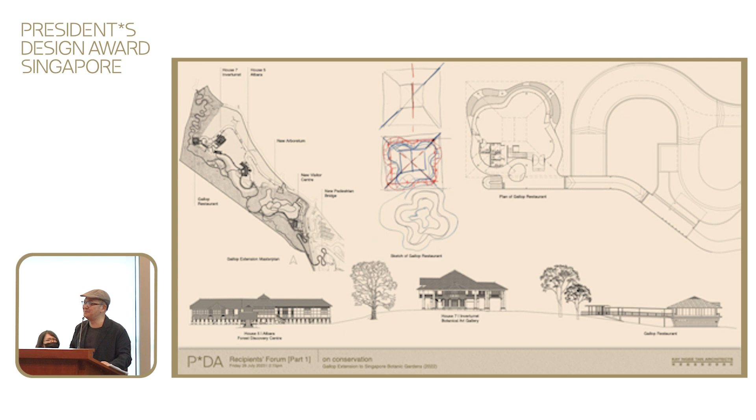The new building did not mimic house number 7. Instead, we decided we were going to have a 360-degree glass building, and the curvature was actually inspired by a local flower, like a piece of orchid.

One thing I want to highlight is that throughout the whole site, next time when you go there, please pay attention to the swale next to the walkway, because these collect rainwater, and then we recycle the water to irrigate the plants within the garden.

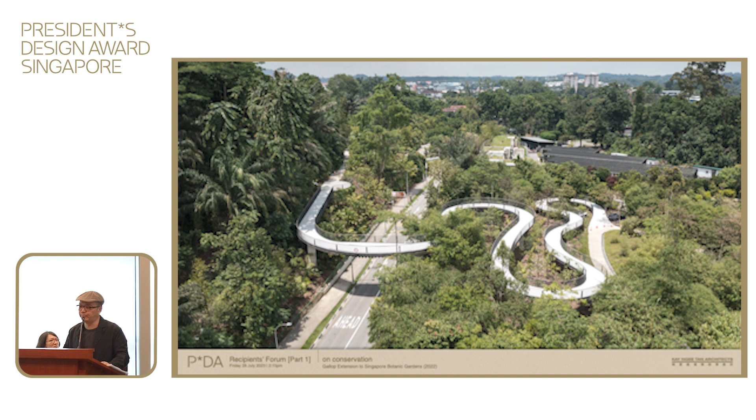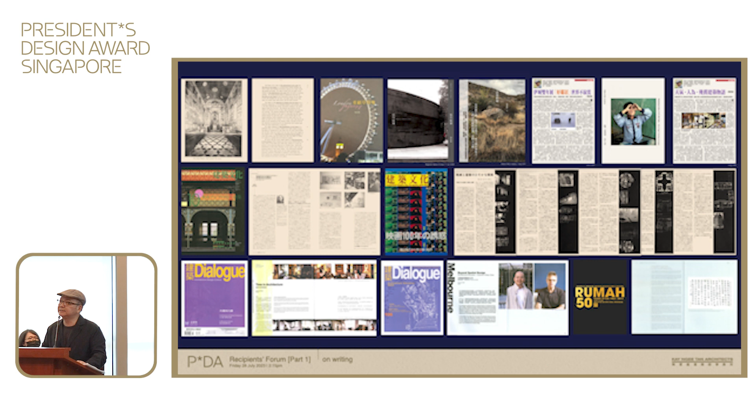We've been very fortunate since the 90s. The appreciation of good design, the appreciation of good architecture, and more importantly for myself, through this writing, I question what actually makes a good design, or what makes a good city tick. And sometimes you don't realize until you complete the writing, then it dawns on you, oh, is that that unexpectedly emerged. So writing is very much part of my thinking process.

In the last couple of weeks, since knowing that I got this award, I've been asked many times, well, a bit like a film director winning the Oscar, and then they ask you, so what's next? I've chosen to show you one project that we are doing.

This project is in east Turkey, in Van. This town is a historical town, it was the capital for Armenian people, and it has a beautiful lake surrounded by mountains. The client was very lucky because he owned 50,000 square meters of land facing the lake, and he's a hotelier, so this is his hometown.

He wants us to design a banquet hall that can hold wedding banquets, exhibitions, or outdoor concerts, and a hotel towards the back where the hill slopes. In between, by the way, there is a wonderful orchard that's been ongoing for, I don't know, hundreds of years, because the orchard was passed down generation to generation.

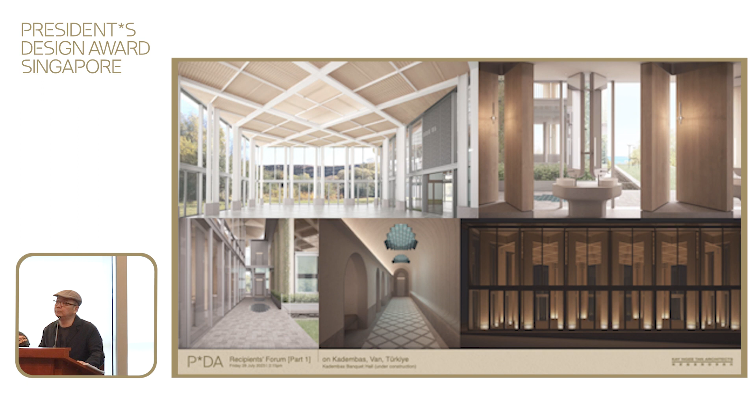So this is a hall that we are building now. You can see the lobby building, the washroom, and the night view. This is work in progress.

After talking about the future, I'd like to bring you back to the past. In 1985, James Stirling wrote a brief for young designers, for RIBA students, to design a gallery for David Hockney, the British artist, and Anthony Caro. I was then already working, having just graduated from the AA, and started working at Arup Associates, but I participated in the competition.

Recently I went back to our London studio. I haven't looked at these drawings for a long time, but because I knew I was going to give this talk, I opened up the old folios, and these are all hand-drawn drawings from before AutoCAD. Well, maybe AutoCAD had already started, I didn't know. But it was sort of like a Rotring pen on tracing paper kind of drawings.

Now, the concept is very simple. It was, as you know, taken from the painting by David Hockney. The two bodies of the building actually rotate, relating to each other because of the different heights of the floor plate. So as you are enjoying the paintings, the artwork, sometimes you are inside, sometimes you are outside, because the ramp will take you in and out.

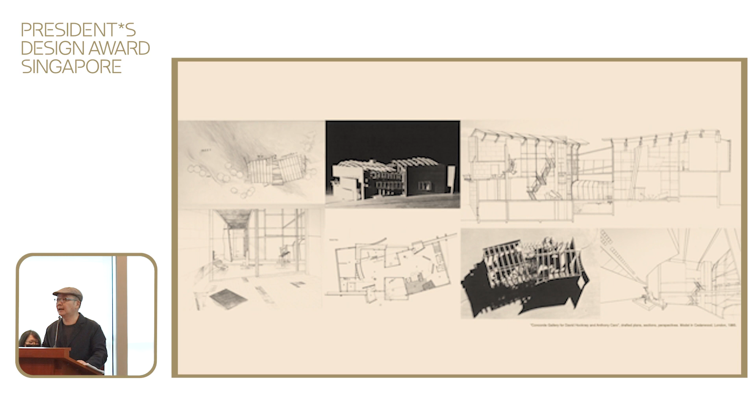It was inspired by one of the perspectives by Schinkel. He looked from the inner side of a building, which is under shadow, then looked out to outer space and onto another building. Not unlike if you go to Gallop, you stand along the corridor of the arches at Atbara and look towards house number 7 - you have the same chiaroscuro effect that I was talking about.

I want to thank PDA for giving me this prestigious award. I'm really honored, and most of all, for giving me an opportunity to look into my old folios. With that, I thank you.